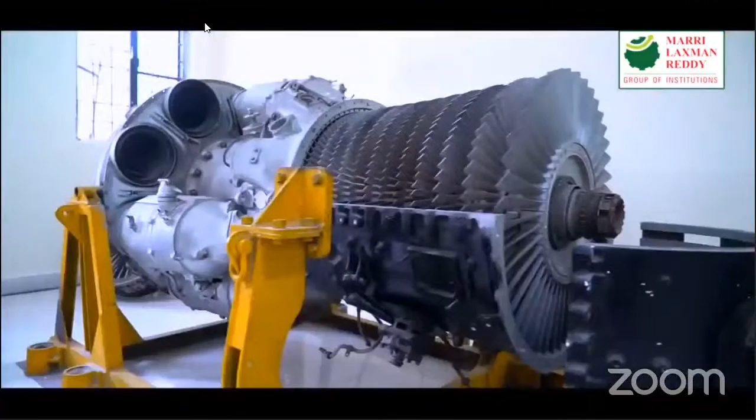Meet the man, Shri Marri Laxman Reddy, who ushered in the silent mission to provide technological advancement from time to time,

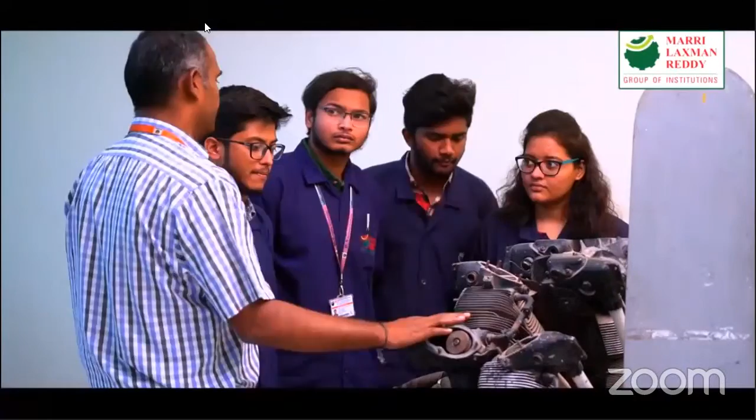Situated in a vast and peaceful area of 35 acres, students here tend to learn by experimenting with live projects through centers of excellence, which is tied up with various industries.

Spacious and comfortable classrooms, corridors, advanced laboratories with equipped ultra-modern audio-visual technology auditorium, accommodating 1,000 plus audience, separate hostels for boys and girls. Each student is specially taken care of with the provision of health facilities and hygienic food in a spacious and eco-friendly canteen, etc., are salient features of MLR Group of Institutions.

AICTE recognized, MLR Group of Institutions is accredited by NAAC with A grade and has NBA accreditation for all programs.

MLR Sports Complex, inaugurated by MLR Group of Institutions, with most advanced multi-sports facilities like cricket stadium, badminton court, table tennis, billiards and basketball, etc.

MLR Sports Complex organizes many national and international university-level sports fests, grooming every aspirant in competing at national and international sports forums. They have successfully achieved 50 gold medals, 13 silver medals and 16 bronze medals at various national and international sports events.

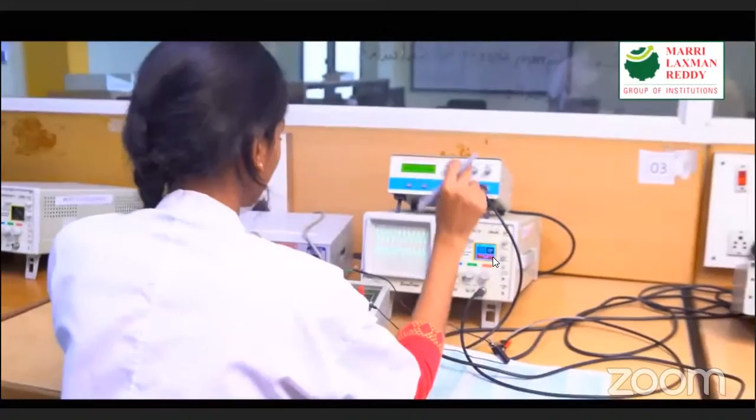To sharpen and extricate students' creativity and entrepreneurial skills, MLR Group has established the Center for Innovation and Entrepreneurship with facilities like Social Square, Innovation Hub and Makerspace.

The Makerspace is a technical prototyping platform for students' innovation and invention, loaded with ultra-modern equipment such as multimedia workstations, 3D printers, CNC machines, and laser cutters, thus providing stimulus for student entrepreneurs.

The center has collaboration with various government and non-government ministries for raising seed funds to incubate student projects and startups. This center has developed 8+ market-ready products and supported 11+ student startups.

MLR Group has set up livelihood business incubation in association with the Ministry of Micro, Small and Medium Enterprises (MSME) to promote new technology or livelihood-based enterprises.

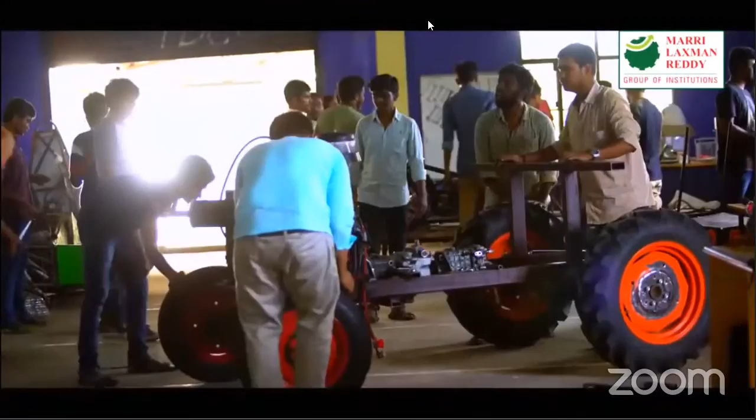The Research and Development Cell has 12 centers of excellence in association with various industries and supports faculty and student research. It also has a track record of 25+ funded projects, 700+ SCI or Scopus journal articles, and 35 plus intellectual property rights, and the progress continues.

In preparing aspirants for real-world competitiveness, MLR Group of Institutions has introduced Indo-Universal Collaboration for Engineering Education (IUCEE) to introduce outcome-based, student-centric education and Bloom's taxonomy-based teaching, learning and evaluation process, along with Engineering Projects in Community Service (EPICS) in association with Purdue University, USA.

SCOPE: School of Programming Practices, to hone coding and programming skills. Students' Platform for Engineering Education Development (SPEED) empowers students to become a factor of change in engineering education and its effect on society and environment.

Club Literary organizes MUN, TEDx Talks and Techno-Cultural Fest to uplift student communication and English skills to the global forum.

MLR Library is fully loaded with diversified study material, books, national and international journals, with a dedicated digital library along with online subscriptions to massive open online courses, IEEE, Elsevier, Springer, ACM journals, etc.

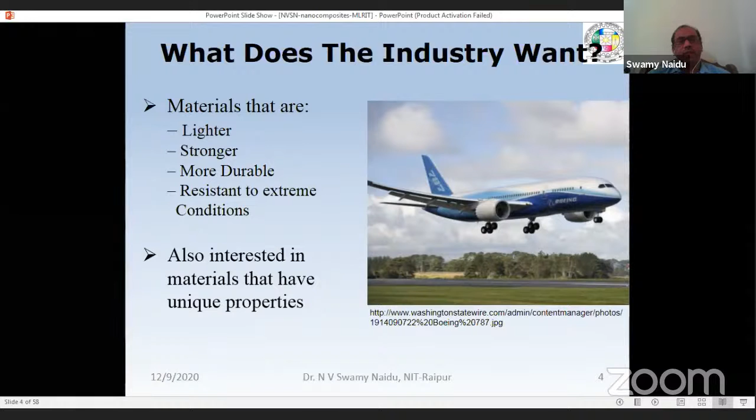They are also seriously searching for materials with unique properties. Nowadays, technologies have grown, with improved electronics, advanced composites, improved paints and sealants, and of course, carbon nanotubes becoming available.

Nanotechnology areas of interest to the aerospace community mainly include high strength composites such as polymer matrix composites, ceramic matrix composites, and metal matrix composites, along with nanostructured materials like nanoparticles, powders, nanotubes, multifunctional materials, and self-healing materials.

Multifunctional materials means the functionality requirement. Suppose now we are seeing only three-dimensional 3D objects. Now we are making that 4D object. The 4D means that other dimension becomes the functional requirement, maybe some kind of sensors including, or some kind of self-healing material. That means whenever a crack is initiated, immediately it self-heals that crack. That kind of material and sensors comes under multifunctional materials.

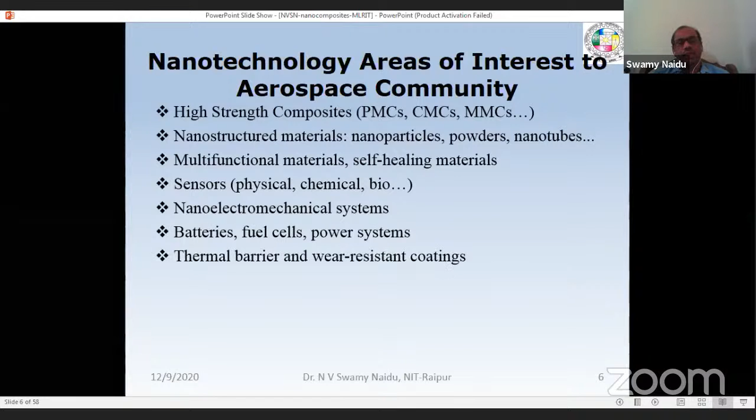The sensors may be physical sensors, chemical sensors, biosensors, and nano electromechanical systems and batteries, fuel cells, power systems, thermal barrier coatings and wear resistant coatings, and avionics, satellite communication and radar technologies, and system integration like nano, micro, and macro, bottom up assembly, that is the impact of manufacturing.

Bottom up assembly is nothing but 3D printing technology. Nowadays 3D printing technology is widely used and there is a lot of research work in nano composite areas, different composites and nano composites, maybe with polymeric nano composites, how to print. They are now widely testing the strength and other properties, whether it is enhancing or not. If everything is possible, then we can print the component itself.

Suppose some component is required in aerospace, the aircraft, some component. If you design that component, obviously we can insert it into 3D printing. Directly we can print the component and directly fit that one. So like that, a lot of work is going on, research work is going on in bottom up assembly also.

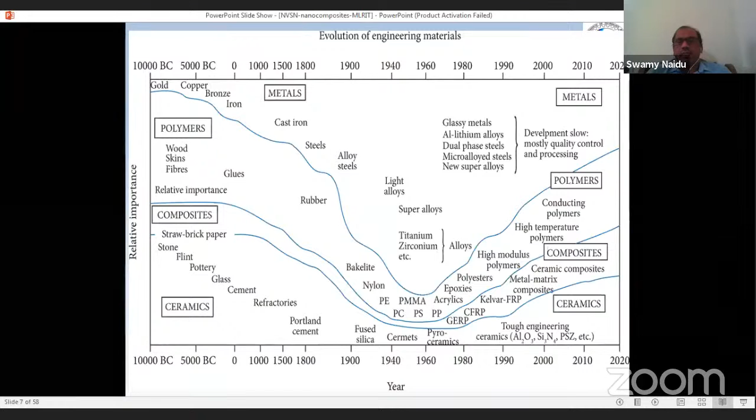The polymers also, we are trying to extract from natural composites, maybe some kind of jute, sisal, some kind of fibers they are extracting, some rice husk or whatever it may be, mostly from whatever is naturally available. So we try extracting those polymers, try to adapt into the systems. Like that, growth is happening in these areas, polymers and composites.

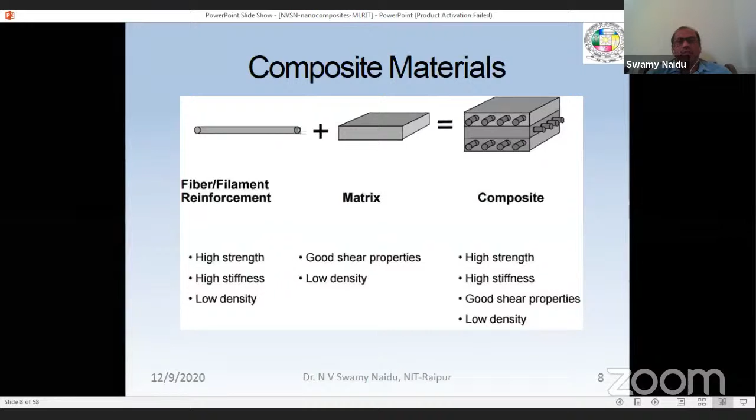And what is composite materials? Composite material basically requires one reinforcement and a matrix, and then finally it forms as a composite. The reinforcement should have high strength, high stiffness, low density, and the matrix should have good shear properties and low density properties. Finally we are expecting the composite material to have high strength, high stiffness, good shear properties as well as low density. This is called a composite.

In advanced composite materials, composite material is nothing but two or more organic or inorganic components combined, and it consists of a high strength nanofiber embedded in a matrix. The matrix material is mainly useful as the material that holds everything together. Generally we widely use epoxy materials and polyimide, some bismaleimide also, and fibers serve as the reinforcement, embedded in a matrix.

So this is fiber reinforced matrix composites, with glass fibers, boron fibers, and carbon fibers. In place of the fibers, you can put particles, and in place of the fibers, you can replace with flakes. Different composites can be classified that way. This is only the laminated fiber reinforced composites; there are also particulate reinforced composites and flake reinforced composites, and other classifications.

Mostly in the aerospace industry, fiber reinforced composite materials are widely used. That is the reason I have given fiber here as one kind of reinforcement, and it should be embedded in a matrix. The different fibers mostly used are carbon graphite fibers, boron fibers, and glass fibers.

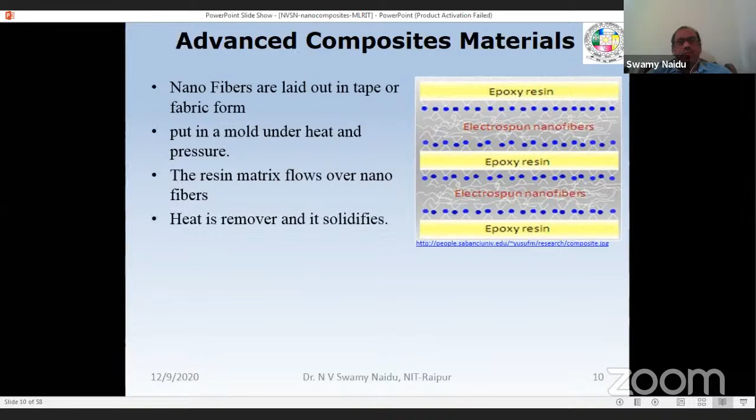Advanced composite materials have nanofibers laid out in a tape or fabric form, and put in a mold under heat and pressure, and the resin matrix flows over the nanofibers. Heat is then removed and it solidifies. It can be formed into various shapes, and in some cases the fibers are wound tightly to increase the strength. So some kind of preparation methodology I have given here.

This is not a unique preparation methodology. Based on your preparation and manufacturing technique, the properties can change, so the uniqueness of the properties we can identify through the manufacturing technology.

In nanocomposite materials, refer to composites in which one phase is at the nanoscale. That is a morphology such as nanoparticle, nanotubes, or lamellar nanostructures type. The improvement of properties by the addition of particles can be achieved when there is good interaction between the nanoparticle and matrix.

Earlier the composite has a matrix and some reinforcement. In the matrix, now we are trying mixing with some other nanoparticles or nanotubes or lamellar nanostructures. As soon as mixing into that matrix, there should be good interaction between the respective nanoparticle and matrix. Then only you will get good properties.

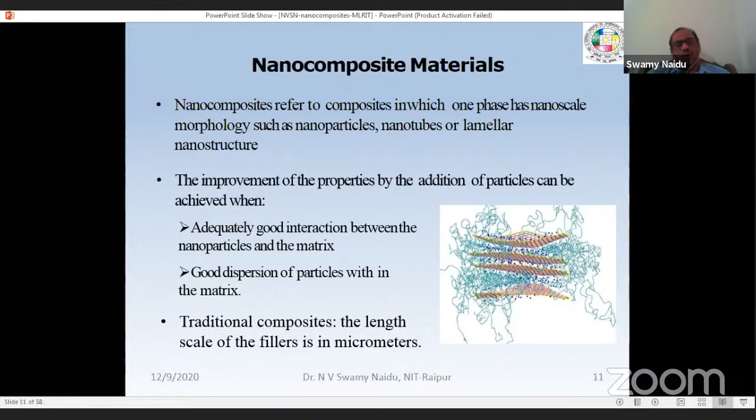In traditional composites, the length scale of the filler is in micrometers. The nanoscale, compared to that, is like comparing the earth to a football - 10 million times smaller, and then 1 billion times smaller finally for the nanoscale. It is a 10 power minus 9 meter scale. If you compare to human hair, this is the human hair, and this is the nanofiber - that is the differentiation.

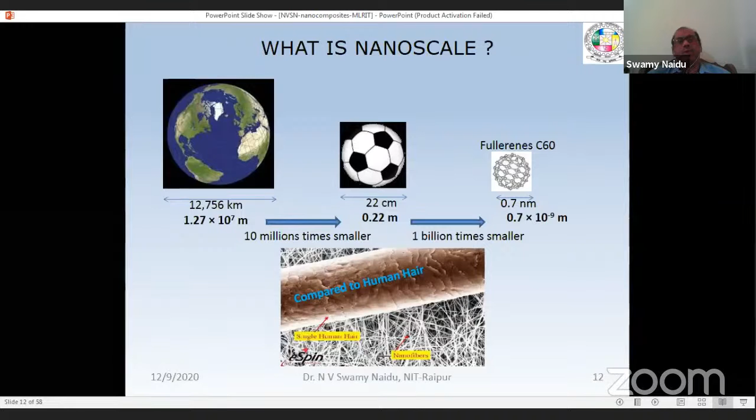So as soon as some material comes under that scale, reducing from macro to micro, micro to nano scale, obviously the strength and properties will exhibit in a better and better way as the scale reduces. That is the reason nowadays researchers try to use more nano scaled materials.

So why do we generally use nano composites? Generally, nano composites have smaller filler size, definitely high surface to volume ratio, small distance between the fillers, and bulk interfacial materials and mechanical properties. It will increase the ductility without decreasing the strength, and sometimes it will make scratching resistance also. Optical properties also will improve, that is the light transmission characteristics depend on the particle size.

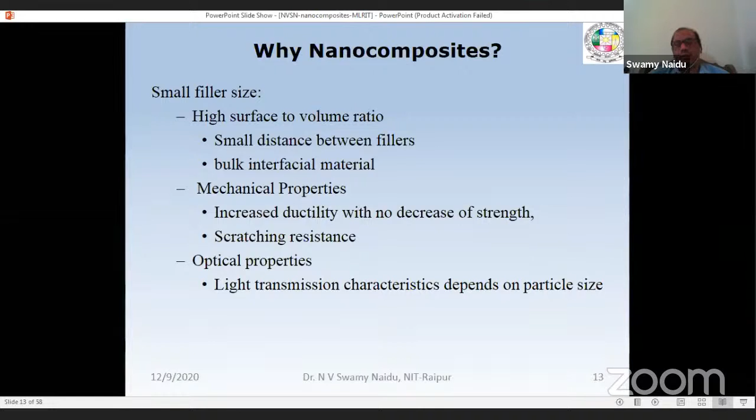Now if you see the classifications of nanocomposites, the nanocomposites are classified based on the dimensional morphology.

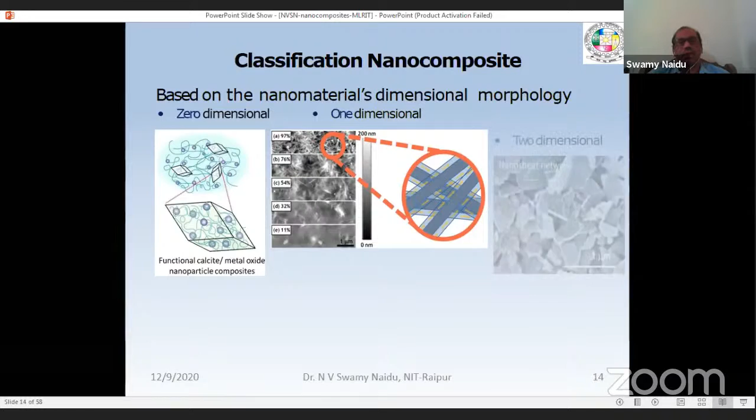This is called zero dimension, the functional calcite metal oxide nanoparticle composites. This is one dimensional, like thin small layers or thin fibers type. This flakes type is two dimensional, and these nano sheets with cubic shapes are generally called three dimensional. So as per nanocomposite classification with respect to dimensional morphology: zero dimensional, one dimensional, two dimensional, and three dimensional.

Nanocomposites are further classified into polymer based and non-polymer based. Polymer based nanocomposites are the combination of a polymer matrix and inclusions that have at least one dimension in the nanometer size range, known as polymer nanocomposite. That at least one dimension may be the length, width, or thickness scale. Generally the matrix material is the polymer, and we mix nanoparticles into that polymer matrix to finally achieve the polymer nanocomposite. Other than polymer matrix, the rest comes under non-polymer based nanocomposites.

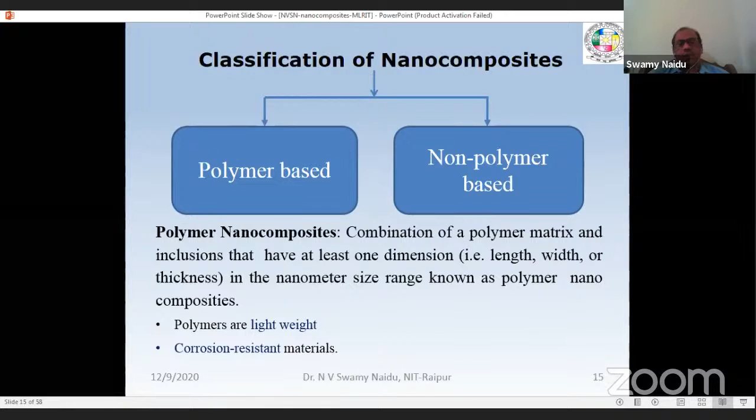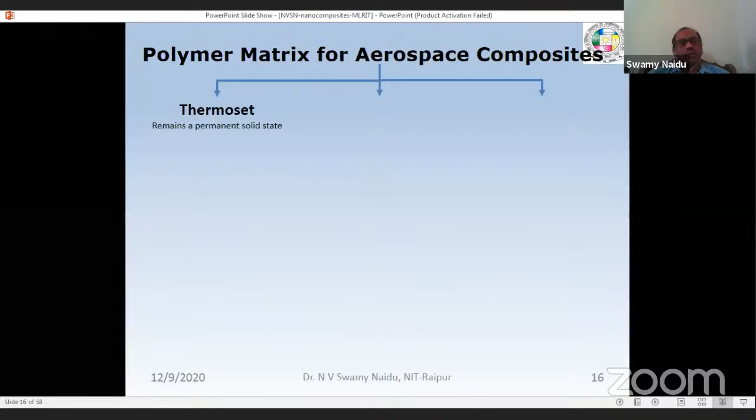Why are polymers used? Polymers are lightweight and corrosion resistant. Polymer matrix for aerospace composites includes thermoset polymers. A thermoset polymer remains permanent in solid state, with high stiffness and strength and adhesive properties, for example epoxy, phenolic, polyimide, bismaleimide. Thermoplastic polymers can be remelted back into liquid, with better impact resistance, high fracture toughness, and moderate stiffness and strength, such as polyketone and polyether ketone.

Another type is the elastomer polymer. Elastomer polymer generally has viscoelasticity, very weak intermolecular forces, excellent impact resistance, very high elongation, and low stiffness strength. An example is polyurethane.

Properties depend on the matrix and nanofillers. Improved properties include mechanical properties, tensile strength, stiffness, toughness, thermal expansion, thermal conductivity, ablation resistance, and chemical resistance. We can use polymer matrix nanocomposites for these benefits.

There are also some disadvantages. Viscosity will increase, so we have to seriously study viscosity, which limits processability, along with sedimentation and dispersion and distribution difficulties. As soon as you mix nanoparticles into the polymer matrix, the dispersion can't be controlled easily. We don't have special equipment to control the dispersion, because once mixed, the nanoparticles disperse randomly, and if not dispersed properly, they eventually settle down at the bottom surface of the container.

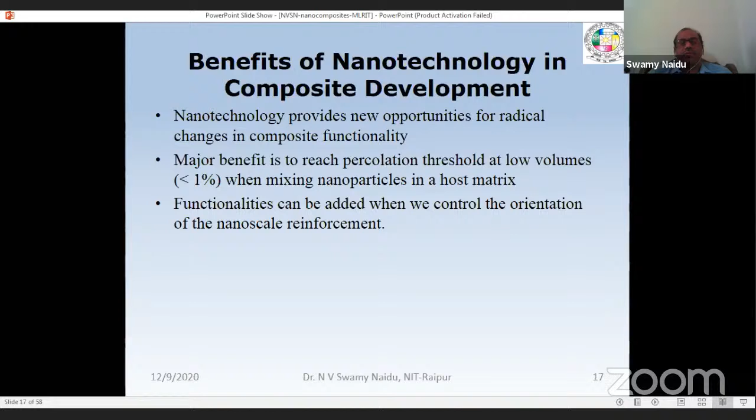So that is the major thing to think about in nanocomposite development, and some functionalities. We can add some functionalities - when the orientation of the nanoscale reinforcement is considered, some functionalities can be added. Like nano fibers we add into these systems, in the Z direction. So how we can make it, suppose there's some type of functionality requirement - if you add certain nanoparticles, how we can extract this functionality requirement from the structure and all.

You have to think about that, do some kind of work, some research or literature, and finally come to conclusions that these combinations may be sufficient to get the functionality requirement. Then you try experimentation - you may not achieve the results on the first attempt, so you'll face a lot of other hiccups in manufacturing such materials.

So finally, based on value interactions and other parameter controls - maybe temperature, sometimes temperature control is also required, sometimes proper mixing - you need to determine which mixing method is most feasible, meaning nanoparticle mixing into the matrix. These are all parameters you have to think about when making nanocomposite material. Some multifunctional materials - we always think about the structure plus. Human intervention is always needed to think about what is the best one.

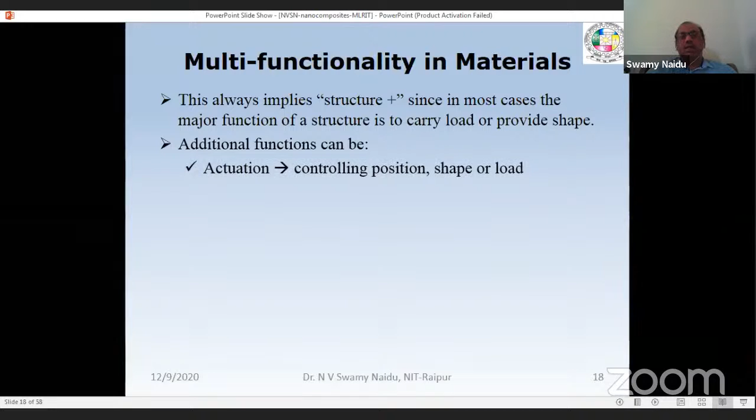Now everything is structure, and people are thinking about structure plus. In most cases, the major function of a structure is only to carry the load and provide shape. But we can't just be happy with this; we have to add other functional requirements, such as sensing or measurement. Additional functionality includes actuation for controlling position, shape or load, some electrical function to either insulate or conduct, and some thermal function to either insulate or conduct.

Sometimes the functional requirement is thermal resistance or thermal conductivity, wherever required. Based on the requirement, the structure can behave like an insulating or conductive material. There is also health monitoring and control of the structure. If the stress goes beyond the limit, it's obviously going to fracture and fail. So how can we monitor and control those excessive loads, or how can the structure heal up among itself?

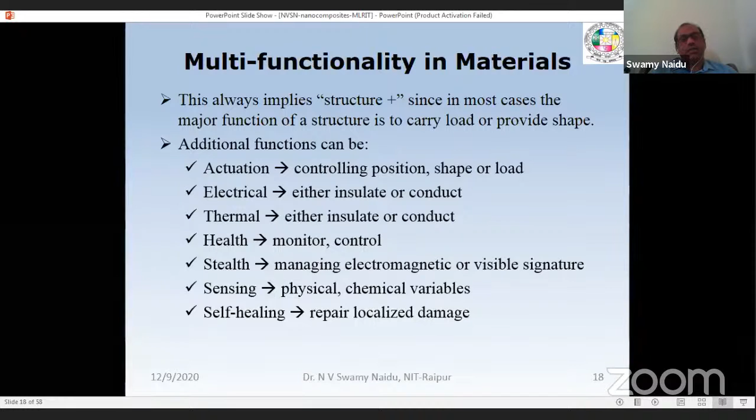Some stealth technologies deal with electromagnetic and visible signatures, along with sensing of physical and chemical variables, and self-healing, which repairs damage in a localized way. When damage happens, you can repair it locally. These are some additional functional requirements. I've listed just a few, but more functions can be added.

Building additional functionalities into load-bearing structures, one key example is the sensing function: strain, pressure, temperature, chemical change, and contaminant presence. Miniature sensors can be embedded in a distributed fashion to add smartness or multifunctionality. This approach belongs to the pre-nano era.

We started making smart materials in the pre-nano era, but now it continues with nanocomposites and smart materials at the nano scale. Using nanotechnology, we can create these smart materials. Nanotechnology, in contrast, is expected to help assemble materials with such functional capabilities within the material itself, so there's no need to add extra components.

It becomes a single component rather than separate parts. If the material itself can incorporate functional capabilities, then whenever you manufacture that component, it will respond based on your functional requirement.

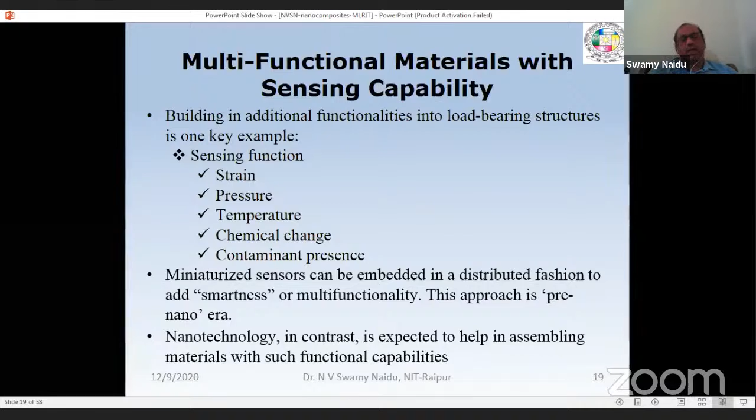Examples of multifunctional materials show it's possible in principle to design composites with multiple levels of functionality, maybe 3, 4, or 5 levels, using both multifunctional matrices and multifunctional reinforcement additives. For self-healing, you can add capsules into a matrix containing nanomaterial that is sensitive to thermal, mechanical, or electrical stress.

When this breaks, it would indicate the area of damage immediately. Those capsules will burst, the material will propagate, and the damaged area will be rectified immediately.

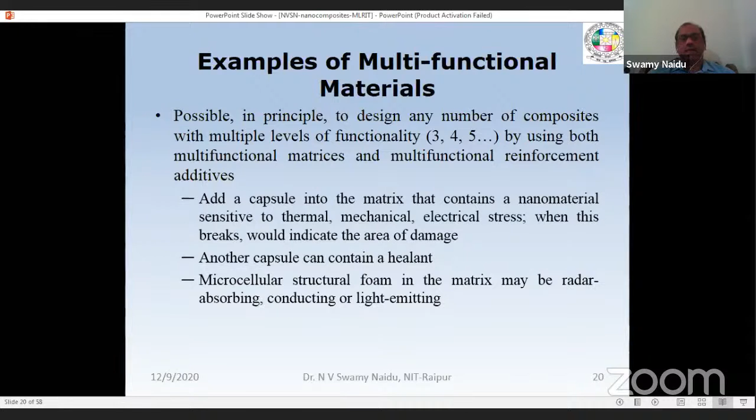Other capsules contain a healant, and microcellular structural foam in the matrix may be radar absorbing, conducting, or light emitting. Photovoltaic military uniforms also contain Kevlar for protection and generate power during sunlight for charging the batteries of various devices in the soldier's gear.

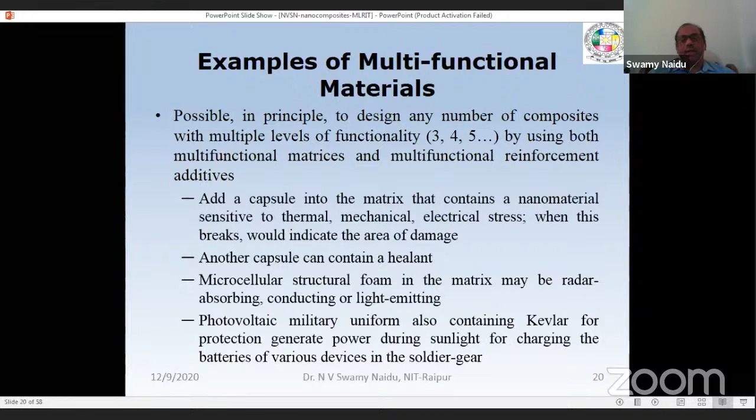So uniforms like this, perhaps Kevlar-based, should generate some power and charge batteries for devices that soldiers use in their respective locations.

Some candidates for multifunctional composites include carbon nanotubes, carbon nanofibers, polymer clay nanocomposites, polymer cross-linked aerogels, and biomimetic hybrids. Expectations include designer properties, programmable materials, high strength, low weight, low failure rates, and reduced life cycle cost. We always expect higher strength, lower weight, lower failure rates, and reduced life cycle costs.

These are the expectations. Examples of self-healing materials: plastic components break because of mechanical or thermal fatigue. Small cracks can become large cracks, leading finally to catastrophic failure. Self-healing is a way of repairing these cracks without human intervention—whenever small cracks appear, they heal on their own.

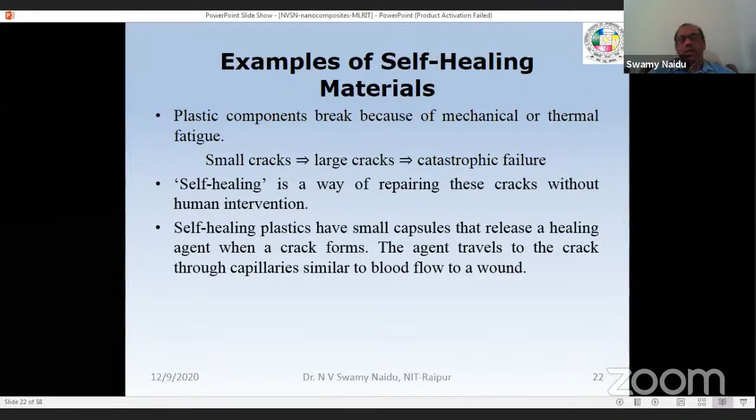Capsules are embedded in the material, and they release a healing agent into the cracks, which eventually restores the original structure. Some self-healing plastics have small capsules that release a healing agent when a crack forms. The agent travels to the crack through capillaries, similar to blood flow to a wound.

Polymerization is initiated when the agent comes into contact with the catalyst embedded in the plastic. The chemical reaction forms a polymer to repair the broken edge of the plastic. The new bond is complete in an hour at room temperature.

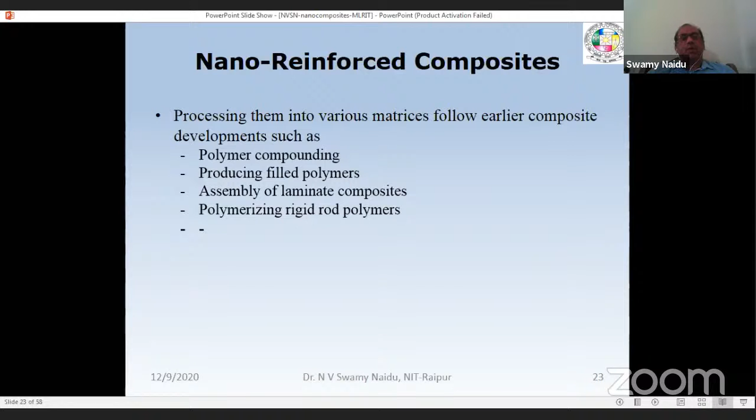Nano-reinforced composites processing into various matrices follow earlier composite developments such as polymer compounding, producing the filled polymers, assembly of laminated composites, polymerization of rigid rod polymers, and so on. The purpose is replacing existing materials where the properties can be superior, and applications where traditionally composites were not a candidate.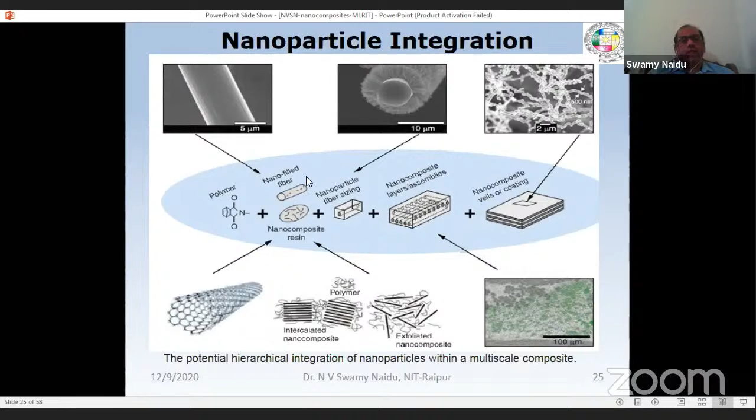I would like to show some video about carbon nanotube composites. Let me check whether the video and audio will come through or not.

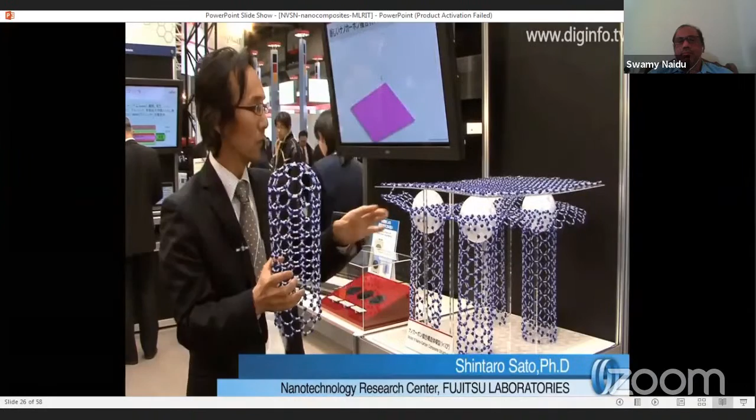One-dimensional carbon nanotubes are structures in which graphene is wrapped into a cylindrical wire shape. Because carbon nanotubes have a one-dimensional structure, they exhibit extremely high conductivity in the vertical direction along the wire. On the other hand, graphene, which has a two-dimensional structure, exhibits high conductivity in the horizontal direction along the layer. If the two structures are combined, we can expect to get a material that is highly conductive in all directions. Until now it has been difficult to create this type of structure, but in our research we discovered almost by chance a structure in which carbon nanotubes are connected to graphene.

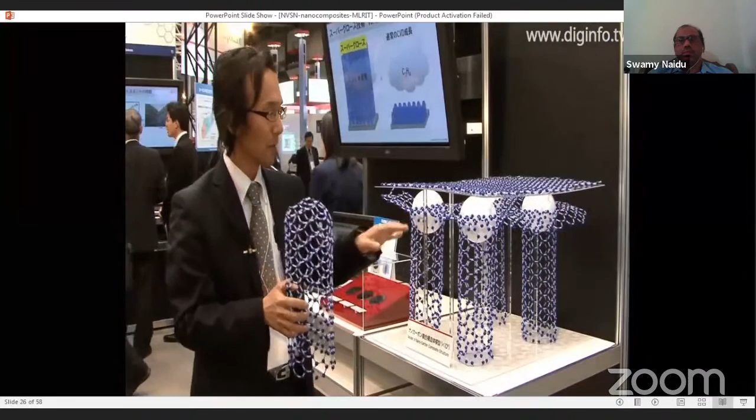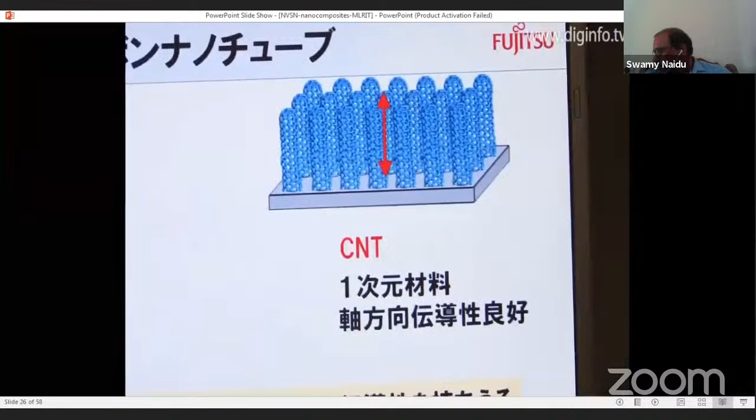Applications being considered for this new material utilize the characteristics of both nanotubes and graphene, particularly their conduction characteristics. Fujitsu and Semiconductor Leading Edge Technologies have joined forces in an attempt to use carbon nanotubes in LSI wiring. In the future, the nanotube section of the joined structure could be used for vertical wiring, while the graphene section could be used for horizontal wiring. We are also considering using this structure to convey heat on a three-dimensional level.

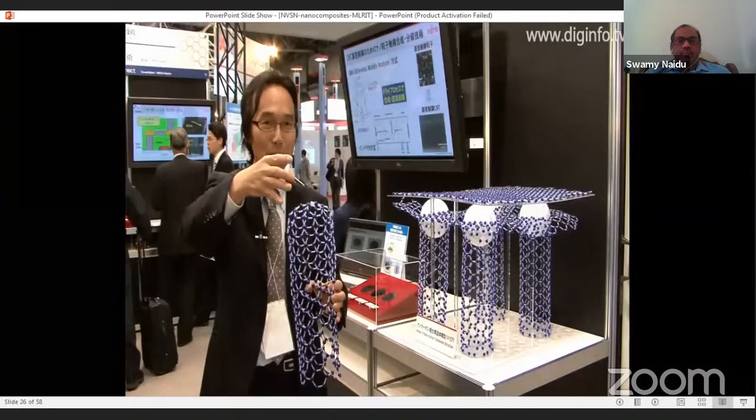Another merit of the composite is its flat surface structure. Normally, when carbon nanotubes are grown on a substrate, there is notable variation in the lengths of the nanotubes, and this variation makes it very difficult to connect with other materials. As a result, an additional process is required to cut the nanotubes to equal lengths. In contrast, this new composite material has an extremely flat surface that makes it very easy to join with other types of materials.

Fujitsu intends to develop synthesis technology tailored to specific applications, and also plans to focus on technology that will enable the structure to be freely controlled.

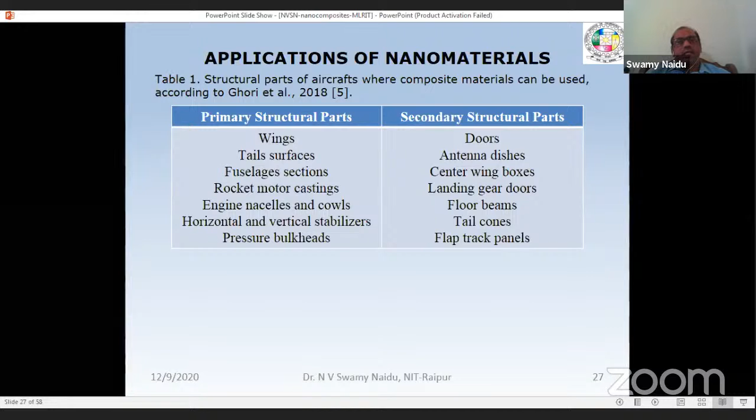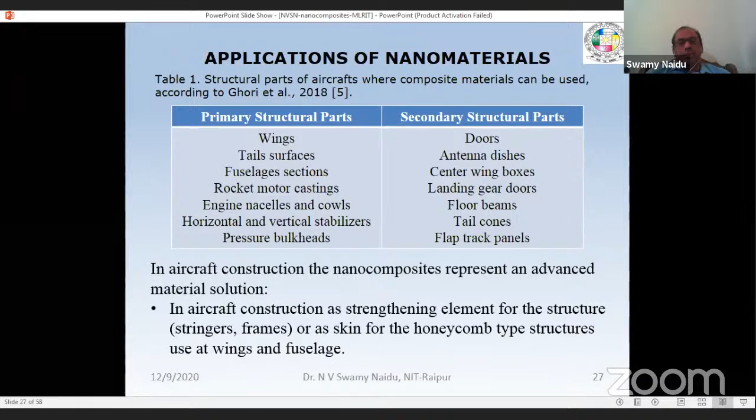In aircraft construction, nanocomposites represent an advanced material solution, used as a strengthening element for the structure, such as stringers or frames, or as a skin for honeycomb type structures used in wings and fuselages.

Some nanomaterial applications are base materials for high temperature use. Carbon composites were developed first for aerospace technology, for components like missiles, re-entry vehicles, space shuttles, and brake lining and brake disc materials for civil and military aircraft.

These materials with non-oxide ceramic matrix represent potential unique solutions for the radomes of hypersonic airplanes. Nanocomposites in the form of zirconia-based complex nanopowders are used as thermal protection for pieces of turbo engines.

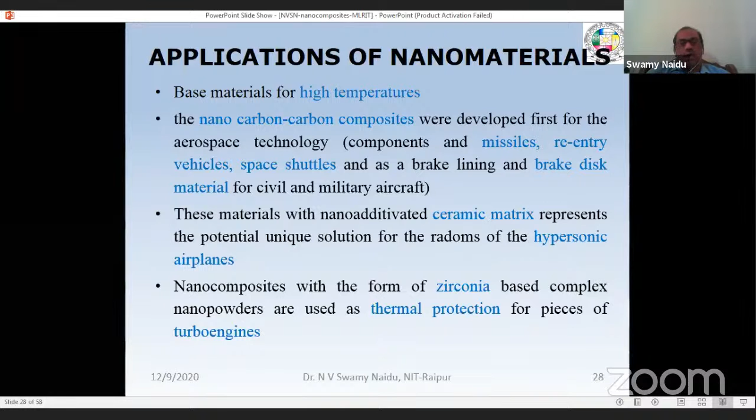Applications of polymer carbon nanotubes across different industries: in the energy industry sector, they are used for hydrogen storage devices, energy storage materials, fuel cells, superconducting materials, and solar cells.

In electronics sectors: molecular computing and data storage, micro electromechanical systems (MEMS), microelectronics, single electron transistors, ultra sensitive electromechanical sensors. In material and chemistry sectors: polymer carbon nanotube nanocomposites, thermal conducting polymer coatings, ceramics and metallics, carbon nanotube composites, tips of scanning probe microscopes, membranes, and catalysts.

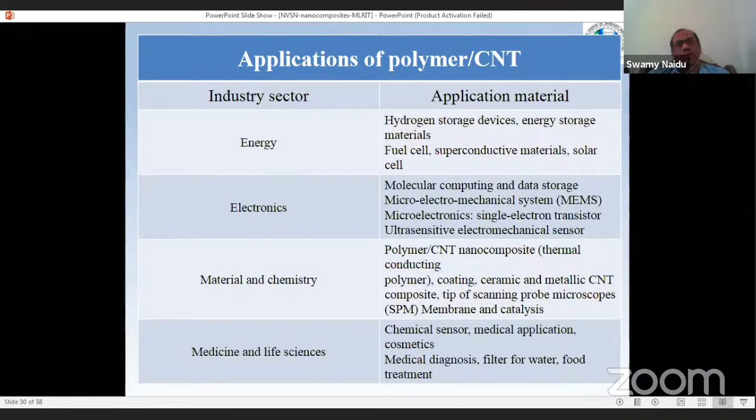Nowadays they are also using these kinds of materials in food packaging. So when food is packed, a certain temperature should be maintained for maybe 1 or 2 hours - for this, we use some packing materials made with nanocomposites.

Some specific applications of nanoparticles in the aerospace industry are for polishing applications. Cerium oxide and tin oxide nanocomposites provide quicker surface removal, minimum amount of material use, and improved finishing.

The other applications are capacitors, pigments, and dopants. These use different nanoparticles such as barium titanate, titanium, alumina, iron oxide, zirconium silicate, and titanium dioxide.

There's a wide range of materials based on applications. These nanocomposites support pigments with low material cost and improved physical and optical properties. Dopants provide better uniformity, decreased processing temperature, and reduction in operating and capital expenditure.

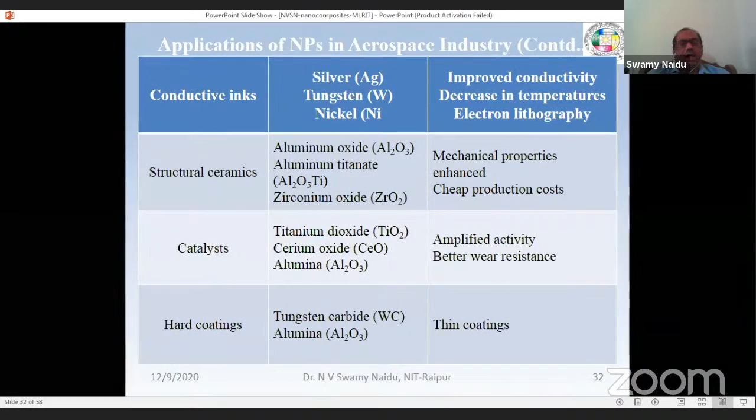Applications of nanoparticles include conductive inks, structural ceramics like aluminum oxide (Al2O3) and aluminum titanate (Al2TiO5), and zirconium dioxide, which enhance mechanical properties at cheap production cost. Catalysts like titanium dioxide, cerium oxide, and alumina amplify activity. For better wear resistance, hard coatings use tungsten carbide and alumina thin coatings.

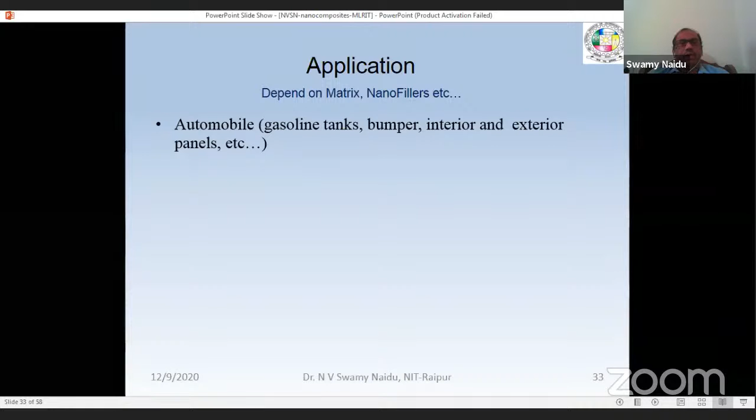This is used as thin coatings. Some of the applications depend on the matrix, nanofillers, etc. Maybe in automobile applications like gasoline tanks, bumpers, interior and exterior panels, etc. Electronic and electrical applications include printed circuits and electronic components, food packaging containers, cosmetic controlled release of active ingredients, environment and biodegradable materials, gas barriers, tennis balls, food and beverage packaging, and military and aerospace applications. So these are the different applications there.

Nowadays in cosmetics also they are using nanoparticles. They are mixing in the nanoparticles.

Some of the ceramic polymer composites and how their preparation methodology works, I have given as a small diagram here, with an active ceramic phase and a passive polymer phase. The properties depend on the connectivity, volume percentage of the ceramic phase, and spatial distribution of the active phase in the composite. Some advantages are flexibility, freedom of design, and processing at room temperature, and some disadvantages also, like lower dielectric properties.

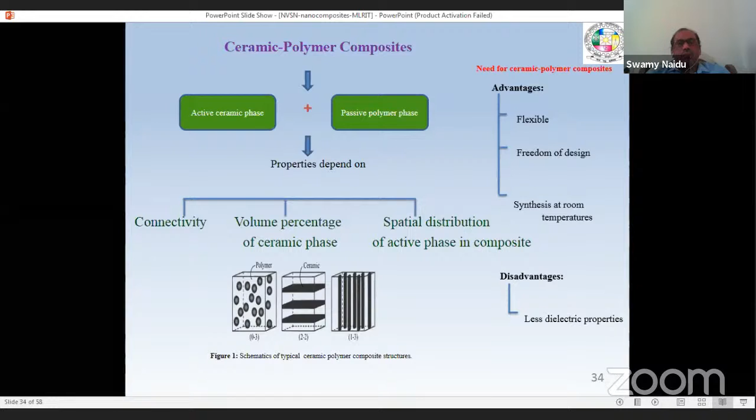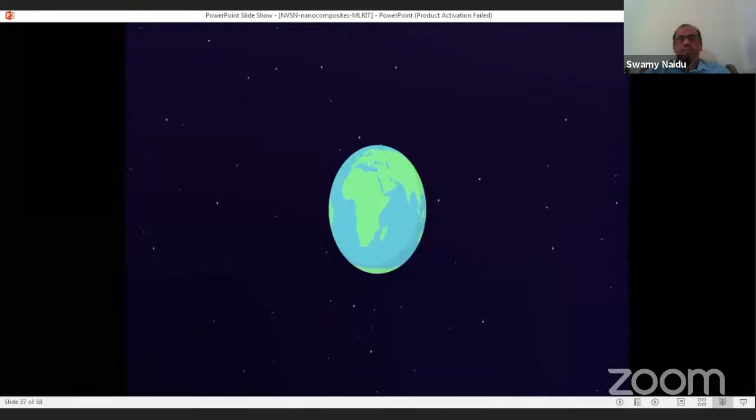At very small scales, matter exhibits bizarre behavior. The ability to engineer materials with nanometer precision has allowed researchers to exploit this behavior to produce materials with novel and often exotic structural, electronic, optical, and magnetic properties. Despite propelling far-reaching advancements in the energy and healthcare sectors, however, nanomaterials have yet to really take off in the aerospace industry, partly because of the high risk involved in investing in technologies that have not quite matured to the lofty standard required by this industry. This issue of MRS Bulletin reviews some of the more promising applications of nanomaterials in human space exploration, which contribute throughout a spacecraft's entire journey out of Earth's atmosphere and back.

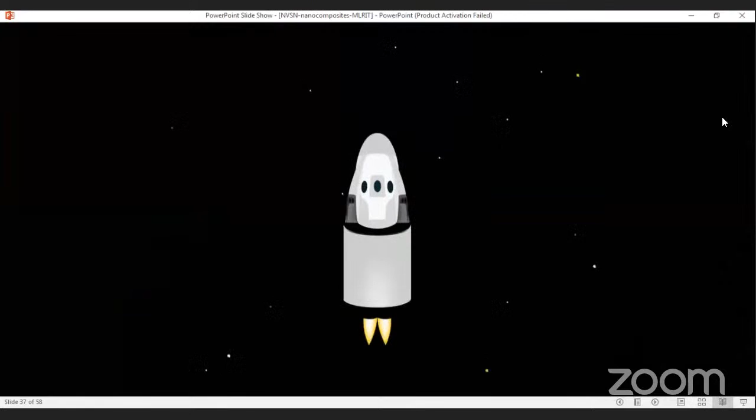The journey into space necessarily begins with successful liftoff. Even in this preliminary stage, nanomaterials can already serve a useful purpose. Because of their high surface area, nanoparticle fuels are highly reactive and burn at fast rates, making them well-suited propellants for aerospace applications. Researchers must, however, balance this reactivity with careful handling and storage. Coating the particles prevents them from clustering together and losing their highly reactive surface area, but it also reduces the amount of active material in a given fuel, thus decreasing performance.

Once in space, whether in orbit or more ambitiously bound for the Moon or Mars, aeronautical systems need reliable ways to produce, store, and transmit energy. Advances in nanoengineering have allowed scientists to develop increasingly efficient and long-lasting silicon-based solar cells. Moreover, research on carbon composites has led to the development of flexible solar cell designs. For example, the Rollout Solar Array, or ROSA system, developed in 2014, features a bendable solar cell array capable of unrolling to deliver power supplies and retracting when performing more delicate maneuvers in space. With respect to energy...

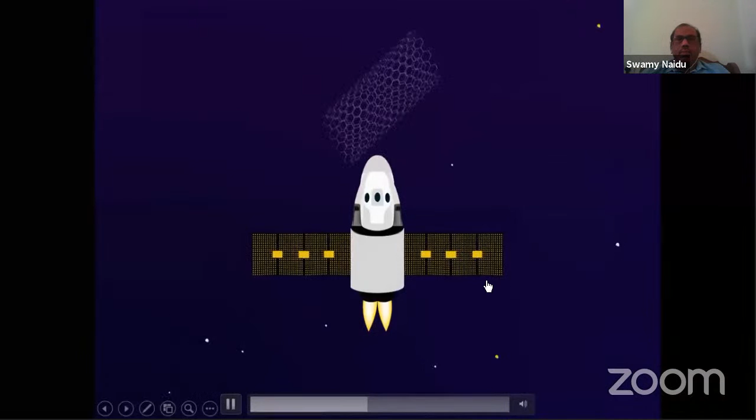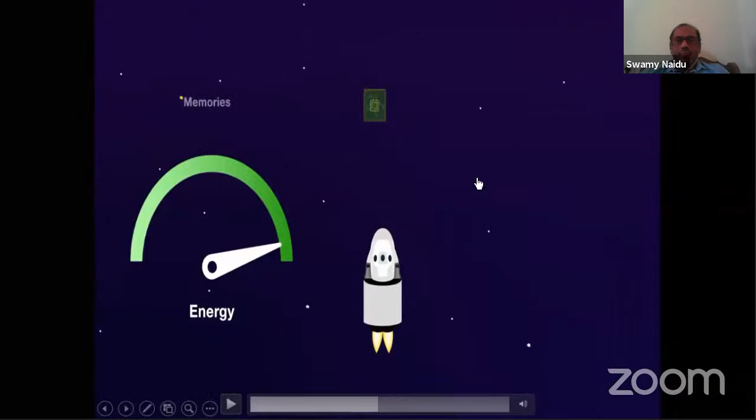Sir, there is an echo. Sir, you are logged in two devices. There is an echo.

Hello sir, yes sir, now it's okay? Now it's okay, but the screen is not being shown. Yeah, yeah, I will share that. Yes, sir.

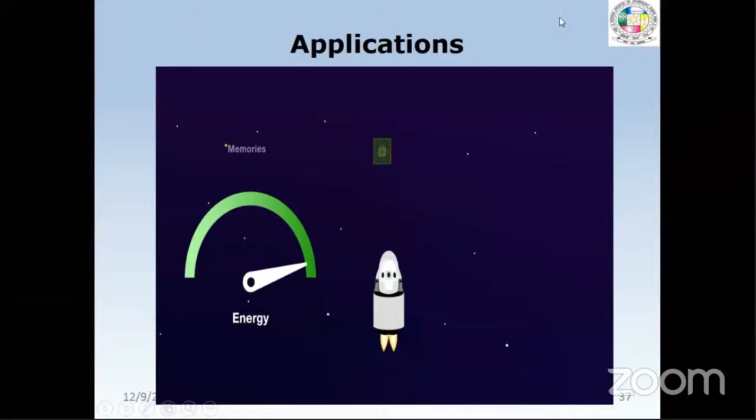Can you able to see? Yes. Audio is okay? Audio is not coming, sir. Okay, audio is okay. Anybody got an answer?

Okay, let us take, let's take the colors. Roll number 5.

It is there. Stop share.

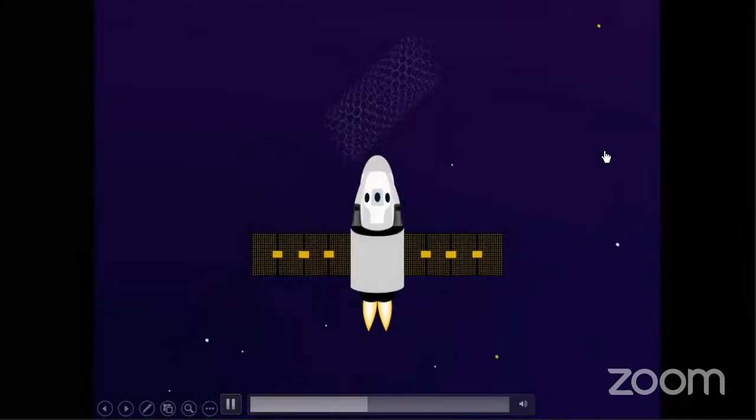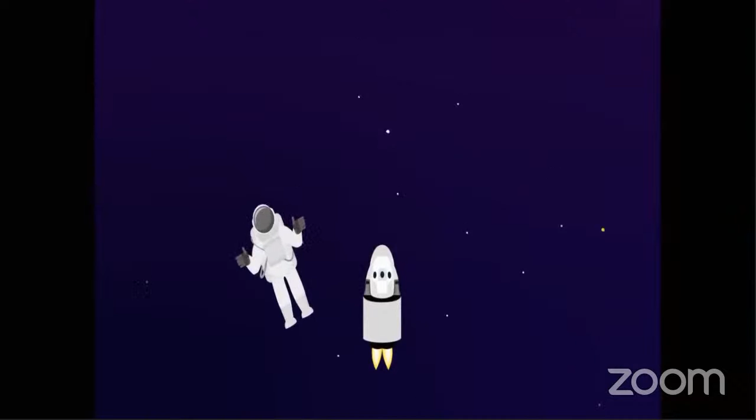At very small scale, carbon nanotube-based supercapacitors and rechargeable lithium-sulfur batteries are expected to yield systems with dramatically improved energy density while reducing the footprint of the electronics they power. Similarly, memory storage devices based on the mechanical movement of nano-sized switches and levers, and high-performance sensors based on nanomaterials are expected to provide electronics that are immune to radiation and consume low levels of power. Of course, these power systems are only as effective as the astronauts who operate them. Technologies for life support therefore represent another area in which nanomaterials, particularly those based on carbon, can make a significant contribution. Scientists have shown that nanometer-sized holes can be punched into a single sheet of carbon, a material called graphene, to form a super-thin water filter.

Additionally, these carbon sheets can be rolled into nanotubes and decorated with nitrogen-based molecules called amines to remove carbon dioxide from the surrounding environment, refreshing the astronaut's air supply.

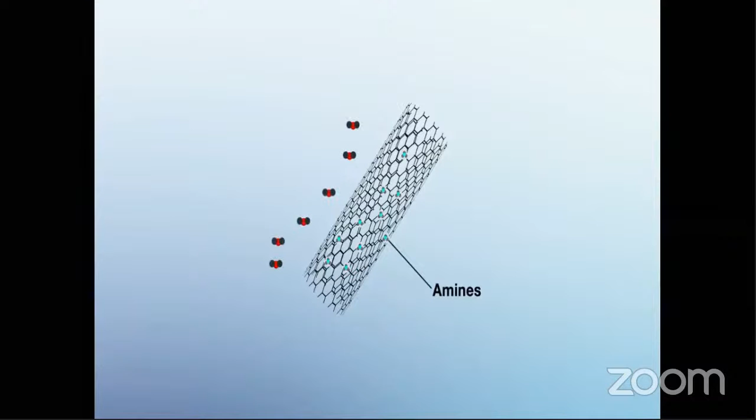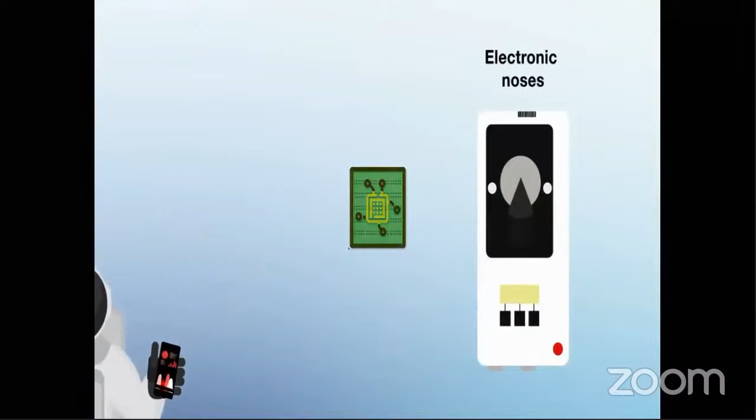Nanomaterials also show great potential for use in biological and chemical sensing. The combination of various biological sensing elements on a single microchip could allow astronauts to carry a medical diagnostics lab in the palm of their hand. And fully functional electronic noses, or e-noses, built using carbon nanotubes could help monitor levels of toxic chemicals such as carbon monoxide and nitrogen oxides.

This need to replenish existing supplies extends beyond life support. There is a similar need to repair, rather than replace, materials during long space flights. Researchers have shown that carbon-reinforced parts critical to spaceflight can be repaired by harnessing microwave energy to heat ceramic and polymer-based materials containing multi-walled carbon nanotubes. Scientists envision using this technique to process materials excavated from planetary surfaces.

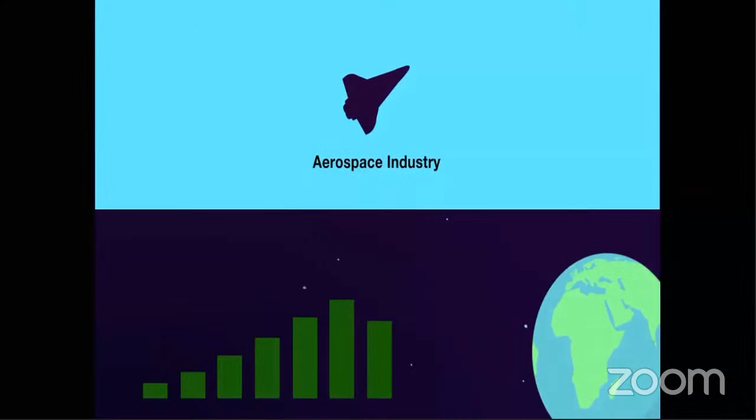This ability to repair spacecraft materials will be particularly crucial to ensuring protection from harmful radiation in space and from the intense heat generated when re-entering Earth's atmosphere. From liftoff to re-entry, nanomaterials can be utilized in numerous ways to improve the current state of human spaceflight. This issue of MRS Bulletin highlights several of these applications while carefully outlining the technical and financial challenges that remain before they're fully adopted by the global aerospace industry.

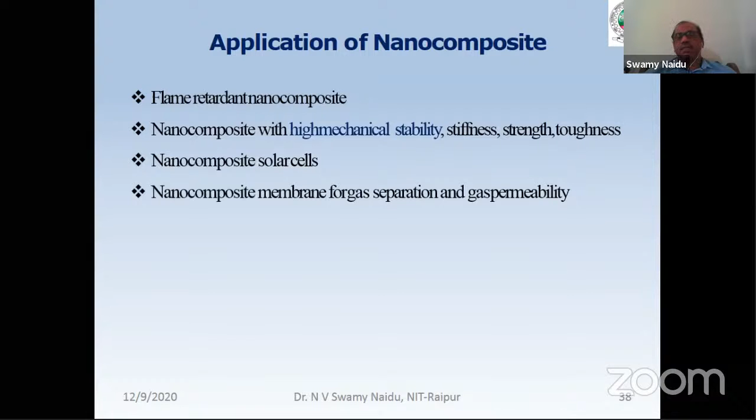The flame retardant nanocomposites, and nanocomposites with high mechanical stability, stiffness and toughness, nanocomposite solar cells, nanocomposite membranes for gas separation and gas permeability, and nanocomposites with gas barrier performance, like this.

If you can make that path a long path, obviously resistance will be developed, so the flame will not propagate from one side to the other side. That is the flame retardant nanocomposite. Using the nanocomposite, the path is increasing. Instead of a direct path, the path increases and becomes a kind of zigzag, which comes from the material structure itself. So if you can change that structure itself, then obviously we can make the flame retardant nanocomposite.

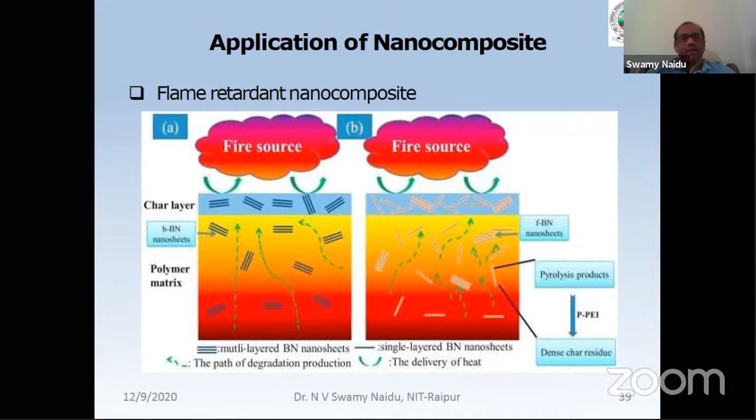It is like a clear membrane. If you make a pipe and want to pass two different types of gases through it, you need a proper way to do this. And sometimes when gases are mixing properly, if you want to mix some gases in a certain portion or ratio, that can also be controlled using these nanocomposite membranes.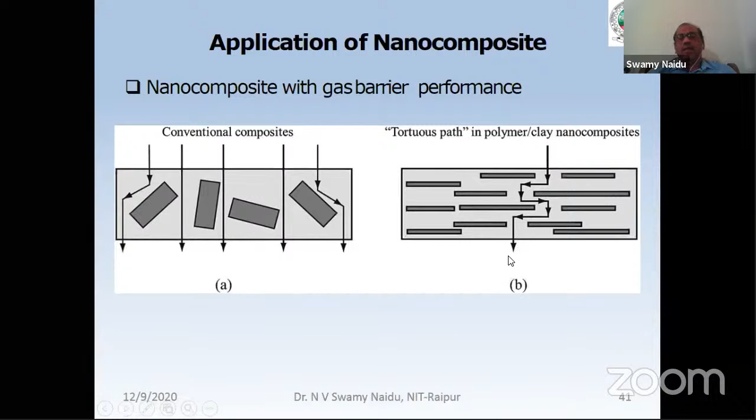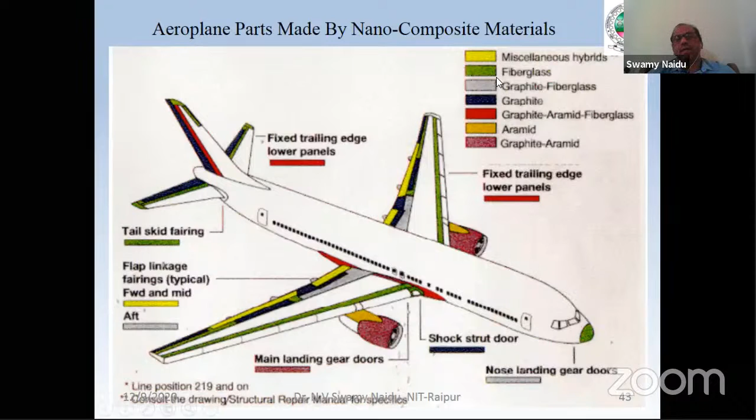In commercial and industrial applications, advanced composite materials, aerospace paints, and de-icing materials are used, along with aeroplane parts made by nano composites. These are the different nano composite materials they are making nowadays, including some used in the 787 Dreamliner.

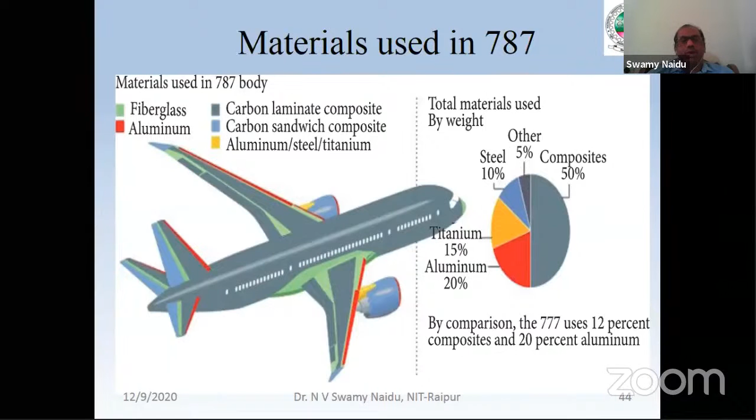The 787 Dreamliner is mostly composite, and it's further increasing toward nano composites, with about 50% composites being used now, being modified further into nano composites. Some jet engine applications include engine components, frames, cases, ducts.

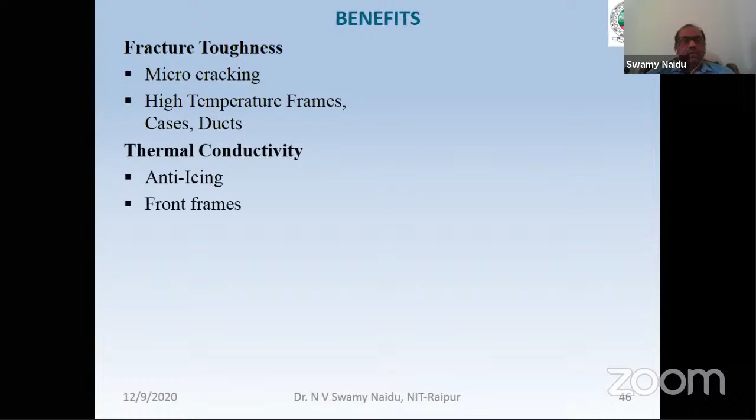Some of the benefits of nano composites are fracture toughness, micro cracking resistance, high temperature frames, cases, ducts, thermal conductivity, anti-icing, electrical conductivity, grounding, bypass ducts, lightning strike protection, nacelles, permeability composites, hydraulic tubings, service temperatures, flange compressive strength, high temperature frame cases, ducts, coefficient of thermal expansion (CTE), microcracking, residual stresses, ply buildups, molding compounds, and high temperature frames, cases, ducts.

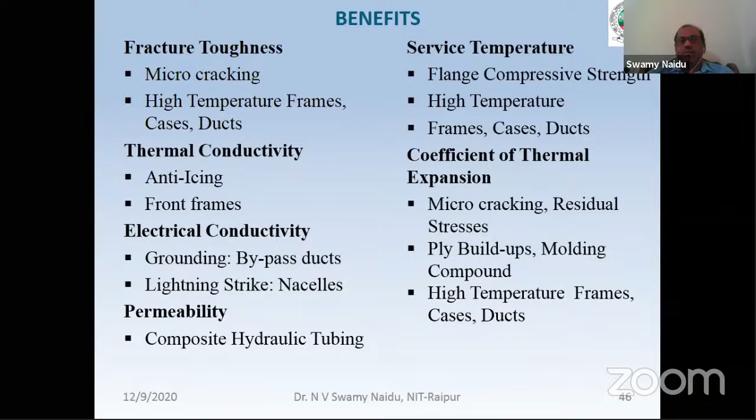The aero coatings requirements are mainly erosion, lightning strike, ice accretion, and corrosion. Erosion comes from dust, cleaning, sand, stone, rain, hailstorm, lightning strike, heat, shock waves, electricity, electric damage, and interferences. Ice accretion is mainly rime and glaze. Corrosion comes from moisture, salt, de-icing fluids, hydraulic oil, engine oil, cleaning solutions, pressure and temperature cycling, and radiation - solar, UV, visible, and IR.

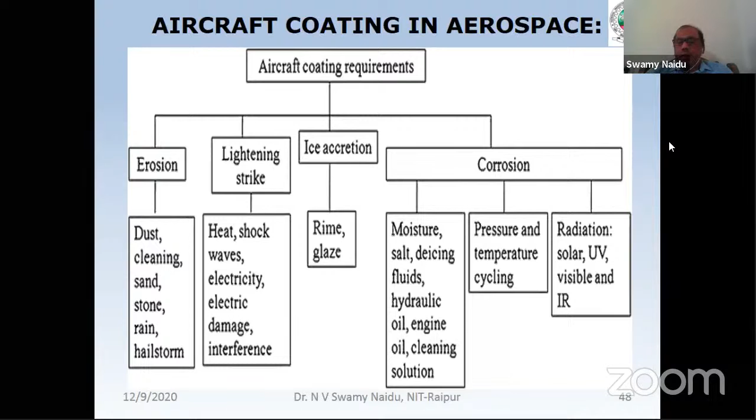Some of the applications are PMNC and CMNC. PMNC means polymer matrix nanocomposites, CMNC is ceramic matrix nanocomposites. I have given here a flowchart of different nanocomposites for aerospace applications, including shielding, health monitoring, tribology, coatings, structures, and CMS.

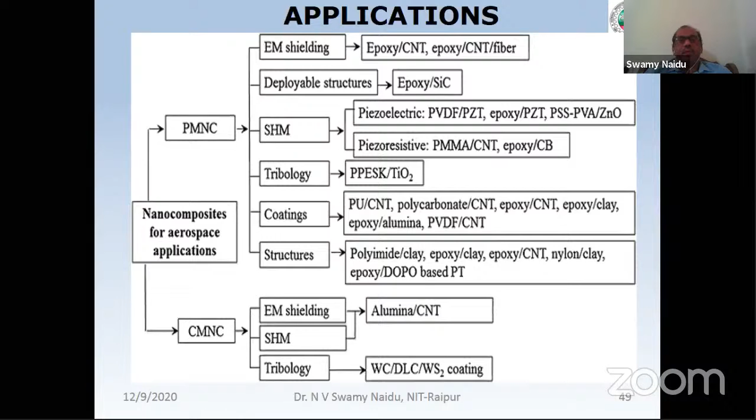So based on the materials and based on the applications, we use these kinds of combinations. These are combinations already done, and other combinations can be worked out based on material availability and properties - we have to test everything thoroughly to see whether it enhances or reduces material properties. Manufacturing techniques and skill technology are also very much required to achieve good nanocomposite materials for any application, not only aerospace.

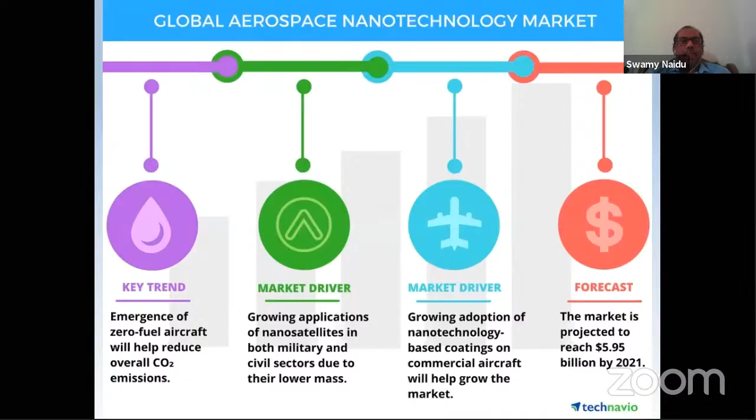If you look at the market trend, the global market shows the emergence of zero fuel aircraft will help reduce overall CO2 emissions, and growing applications of nano satellites in both military and civil sectors due to their lower mass. A market driver is growing adoption of nanotechnology based coatings on commercial aircraft, which will help grow the market. The market is projected to reach $5.95 billion by 2021.

So that means, with respect to this, the nanocomposite material usage demand is growing day by day, so someone can maybe focus more on this area. Definitely in another 15-20 years it will be a good opportunity. There are so many other attractive opportunities in the nano composite market - this covers some of the market sense and attractive opportunities.

So finally, to summarize my presentation: nanotechnology is an enabling technology that will impact the aerospace sector through composites, advances in electronics and sensors, instrumentation, materials, and manufacturing processes. The field is interdisciplinary, but everything starts with material science - without material, nothing will be there.

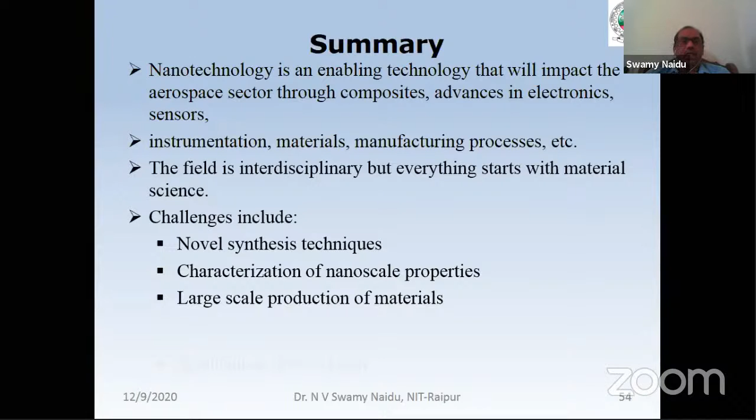Material science, everything should start with material science. The challenges include novel synthesis techniques—that's mainly the challenge we are facing right now—and characterization of nanoscale properties, how to characterize in a proper and correct way, and large scale production of materials. If everything is achieved well, how we can produce the material in large scale for commercial applications, and some application development also.

Opportunities and rewards are great, and hence there is a tremendous worldwide interest.

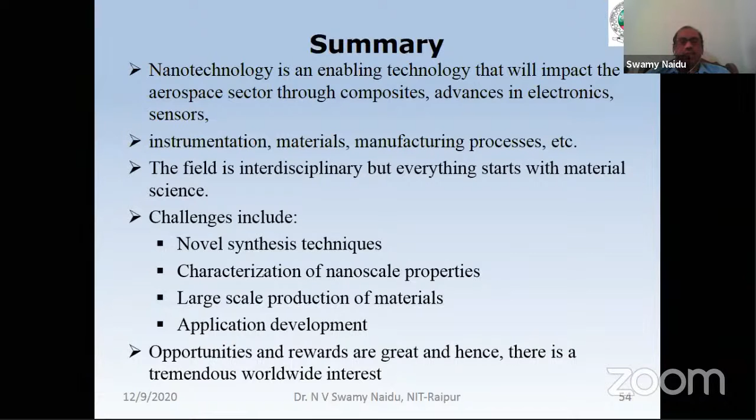This is the possibilities for the future. Nanotechnology may make it possible to manufacture lighter, stronger, and programmable materials that require less energy to produce than conventional materials, and promise better fuel efficiency in land transportation, ships, aircrafts, and space vehicles.

The future of nanotechnology could very well include the use of nanorobotics. A lot of work is going on in nanorobotics now. These nanorobots have the potential to take on human tasks as well as tasks that humans could never complete, such as rebuilding the depleted ozone layer.

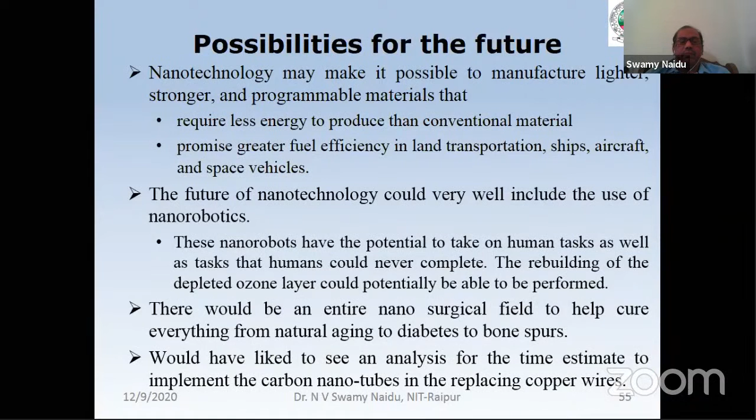There would be an entire nano surgical field to help cure everything from natural aging to diabetes to bone spurs, and I would have liked to see an analysis of the time estimate to implement carbon nanotubes in replacing copper wires.

Future of nanocomposites: polymer nanocomposites are the future for the global packaging industry. Once production and material costs are lower, companies will use this technology to increase their product stability and survivability through the supply chain, delivering higher quality to customers while saving money.

The advantages that nanocomposites offer far outweigh the costs and concerns, and with time the technology will be further refined and more developed. Research continues into other types of nanofillers, not only carbon, allowing new composite structures with improved properties that will further advance nanocomposites used in many diverse packaging applications.

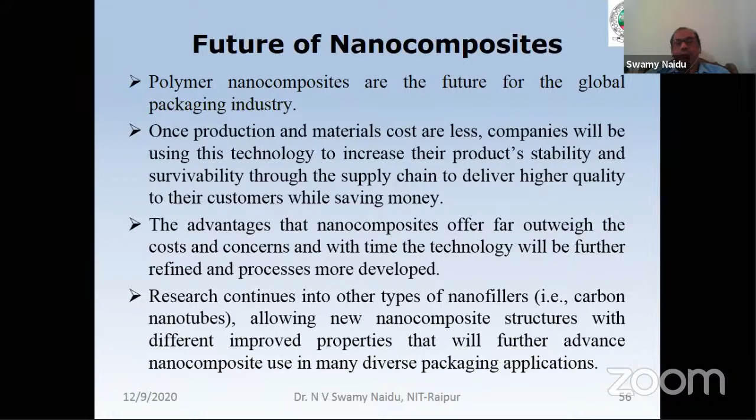And I'm ending my presentation with a quote from Dr. APJ Abdul Kalam: 'Look at the sky, we are not alone. The whole universe is friendly to us and conspires only to give the best to those who dream and work.' So Abdul Kalam used to say that you have to dream it and you have to work for the dream.